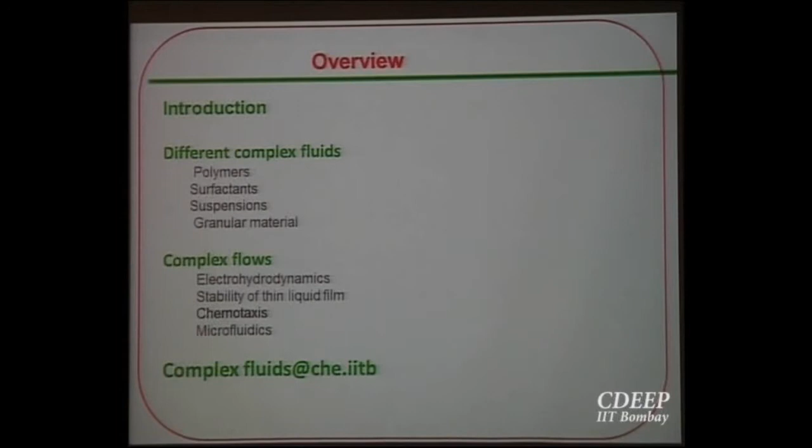Here I am going to give you a brief introduction on the present status and the opportunities in areas of complex fluids. So I will first give a brief introduction, what is complex fluids, then I will move to different types of complex fluids such as polymers, surfactants, suspensions and granular materials. Those are not the only complex fluids available in nature. The complexity is beyond, but the time is limited and the patience also will be limited. So I have put the main complex fluids related to the chemical engineering disciplines.

Then after putting those introductions on complex fluids, I feel this is not enough. Probably there is something which is complex flows, which consist basically of fluids that are simple, but when you combine those simple fluids, the nature will be basically complex. So I have put the behavior of complex flows. In general, these complex flows are also treated as complex fluids. Under this umbrella, key things which will come are electrohydrodynamics, stability of thin liquid films, chemotaxis and microfluidics.

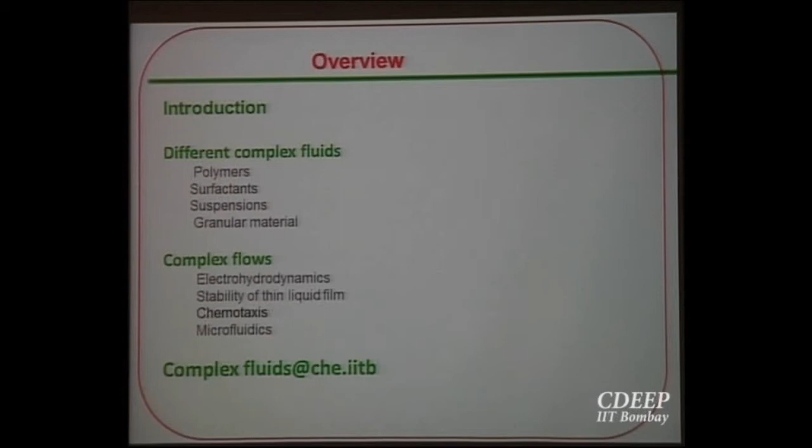Let us try to understand what is complex fluids. There is no particular definition of complex fluids. The definition is obviously a negative: what is not simple fluid, that is complex fluid. Now let us try to understand what is simple fluid. Suppose you have a fluid confined between parallel plates. You have solved this problem in your transport phenomena classes. This is a very simple problem. Either you move one plate or you move two plates, then put the boundary conditions. You can solve the simple momentum balance equation or Navier-Stokes equation to get the flow behavior.

In doing so, what you consider is that stress is proportional to rate of strain. Sometimes it is called rate of deformation, but this is some spicy name, that is strain rate. So the constant which indicates the proportionality is the viscosity of the fluid. That is the property of the fluid which will act when there is deformation, otherwise it has no role to play. Then after putting the relation in your Navier-Stokes equation, you get what should be the velocity profile. Obviously you will get a linear profile provided your flow is laminar.

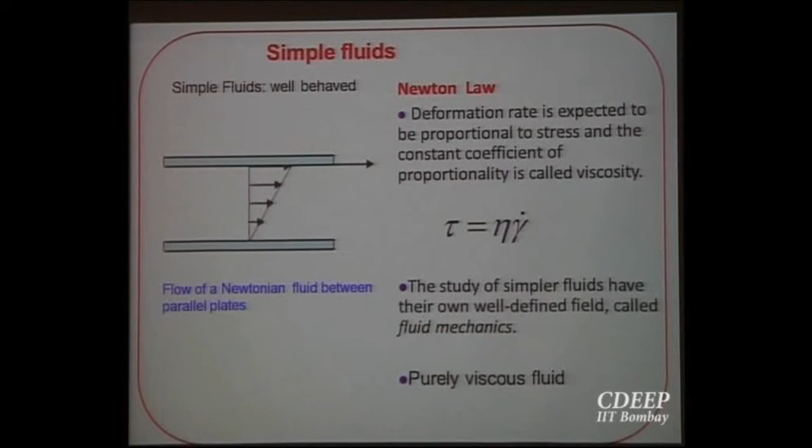Those are purely viscous fluids. If you give them energy, there will be dissipation, ultimately there will be a balance. There is no memory effect of the fluid. Fluid cannot remember anything. The behavior is instantaneous, and after certain time it will reach a steady state, and you can get a nice velocity profile there. Now, I have introduced the simple fluids. I have taken the properties which are called rheological properties.

Let me tell you what rheology is. Rheology is nothing but the study of deformation, and the fluid is a substance which deforms. There is a difference between solid and fluid. I think all of you know that for fluid we consider rate of deformation, for solid we consider only the deformation, which is described by Hooke's law. Now, complex fluid does not follow Newton's law or Hooke's law. There might be a combination of both, but it is not a single relation.

So, the mathematical formulation which relates your shear stress with the deformation is called constitutive relation. I have written it here because constitutive relation is the only relation which makes the difference between a simple fluid and a complex fluid. So, what are the rheological properties? Three properties are there in general we deal with: shear stress, normal stress and normal stress difference. For Newtonian fluid there is no normal stress difference, like sigma xx and sigma yy, there will be no difference in case of simple fluid, Newtonian fluid, but there will be a finite difference if the fluid is non-Newtonian.

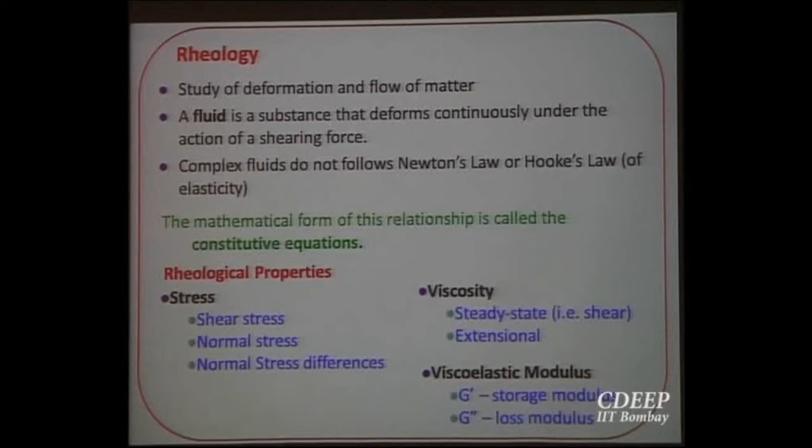The physical significance is that storage modulus means it is keeping in memory. The memory effect will come. It is some sort of elastic modulus. And the loss modulus is nothing but your viscous modulus, how much energy will be dissipated, and storage modulus will take how much energy within that to react after that. Suppose there is an elastic material, after deformation if you leave it, it will come to its original position as if it is remembering where it was, but a Newtonian fluid will never be able to remember that effect.

Now, non-Newtonian behaviors are shear thinning behavior, shear thickening behavior. Sometimes it is called yield stress, means the minimum stress required to go over that, and the other effects are viscoelastic effects, that means with viscous forces there will be some elastic forces also. And the resultants of these viscoelastic forces are the Weissenberg effect, and some other outcomes of fluid memory, and die swelling. I will explain it one by one.

So, for a Newtonian fluid, if you look at this curve, it is perfectly constant. Similarly, for pseudoplastic and dilatant there is a change of curvature, means your viscosity is dependent on the shear rate. Bingham plastic is linear, but you need a threshold stress, okay? Otherwise it will not deform.

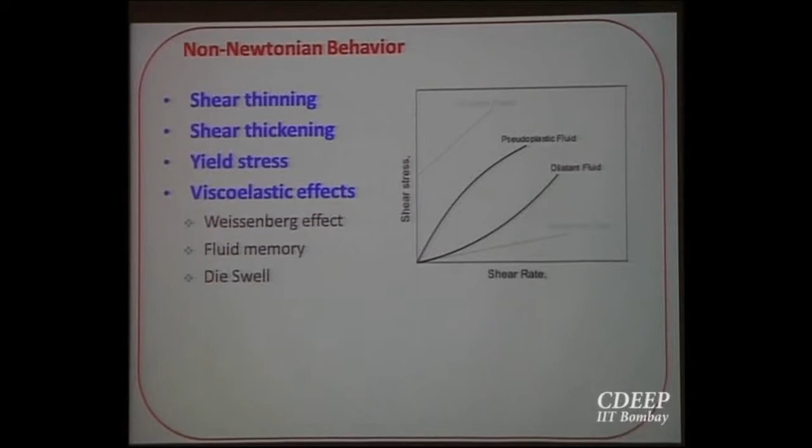Now, I have classified the complex fluids in everyday life. So, foods: emulsions like ice creams, foams, these are almost similar, gels or cheese. Personal care products: suspensions mostly related to surfactant solutions and foams like shaving cream. Biofluids or suspensions like blood, your gels. Other solutions are there. Liquid crystals are nothing but a particular orientation of your surfactants; they behave like liquid and crystal, that is why they are called liquid crystals. Pharmaceutical products, emulsions, aerosols and polymers are complex fluids.

Now, why do we need to understand complex fluids? Here is the reason. If not understood, they can cause immense trouble during their use. If understood, they can reveal enormous potential for application.

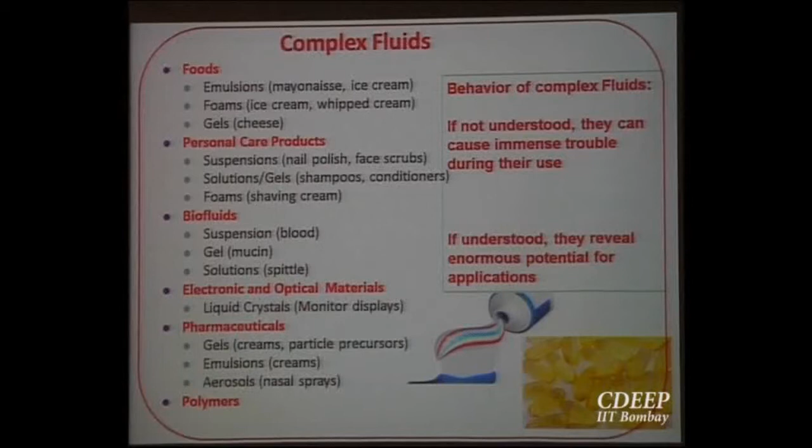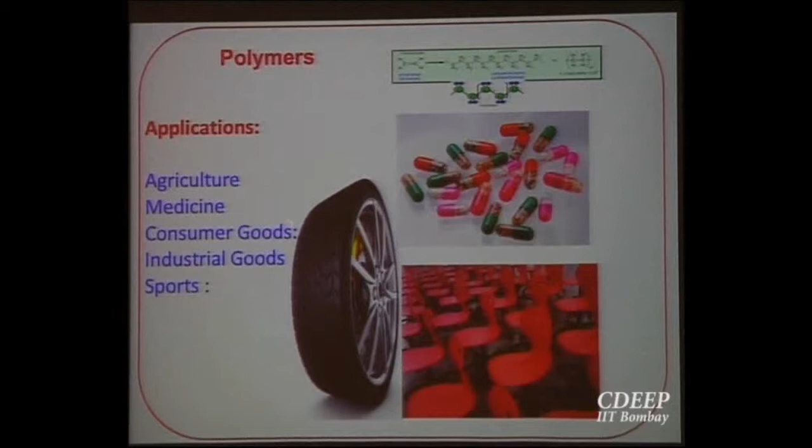Now, some colorful pictures. Polymer application is everywhere. Nowadays, there are restrictions on using polymers, so more emphasis should be given to research on polymer use. Agriculture, medicine, consumer goods, industrial goods and sports.

Polymer properties. As I told you, there is the memory effect. So, elastic over a short time scale and viscous over a long time scale. Short time scale means it can remember the deformation for a while, but if you give that deformation for a long time, it may not be able to remember its initial state. That is why those are called viscoelastic.

Now, shear thinning behavior is observed in the case of polymers. What is shear thinning? If you put high shear, there will be thinning, there will be a decrease in viscosity. That is why it is called shear thinning. Similarly, it happens for extensional strain rate also; like your shear viscosity, there is extensional viscosity, that also can change.

Now, what are the major parameters which play an important role in polymer dynamics? Those are entanglement. Polymer chains will club together and entangle with each other. That basically dictates the properties which we will observe.

So, entanglement increases the viscosity and reduces the shear thinning properties, like the change of viscosity will reduce, but the viscosity will increase and slow down the response. Now, you can easily understand the phenomena. Suppose lots of chains are entangled together, so degrees of freedom are basically decreased. Now, if you put shear, they are not able to align.

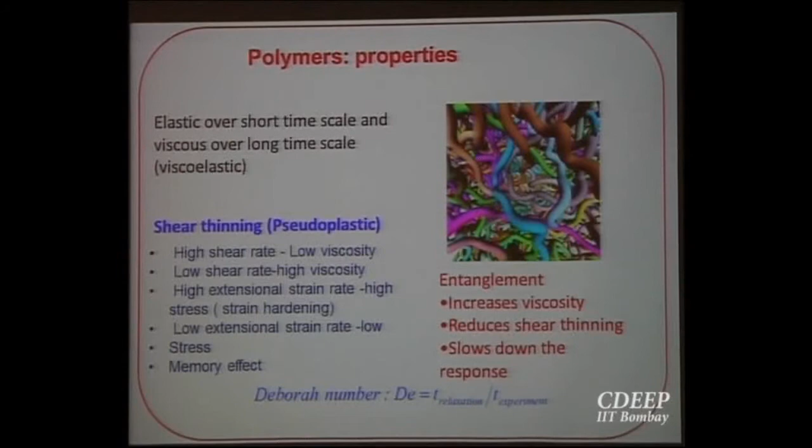So, Deborah number basically dictates the nature of the polymer dynamics. This is nothing but the ratio of relaxation time to the experimental time scale. What is experimental time scale? The time within which you can observe the change of the property. If your experimental time scale is much more than your relaxation time, then you can observe different behavior than the other way.

Here are some nice pictures. This is called Weissenberg effect. What is there? Suppose in a vessel, in a pot, you have polymer solution. Now, you are rotating. This is called a rotational type geometry. So, if you rotate it just by a rod, what will happen? Polymer will climb. It is a very well known phenomenon, called Weissenberg effect, and it happens due to the normal stress difference.

For a Newtonian fluid, it will just simply rotate, or there might be some depression near the stick. But in case of polymer, a normal stress will be created, and since it is a free surface, it will try to climb out. Now, the climbing will depend on different interfacial phenomena and the gravity forces.

Similar thing happens when there is a die. Suppose your polymer fluids are flowing through the die; when it comes just out, due to the normal stress, it will swell. So, this phenomenon is very important to study in the process industry, where you use extruders very frequently, in polymer processing. So, the complication in this area is memory effect. For that, sometimes we need to use a convected reference frame.

Polydispersity: molecular weight of the polymer might be widely dispersed, so your property also will change. Now, how to tackle this polydispersity in your situations? Branching will again control the outcome of the entanglement, similarly copolymers, blends and composites. So, these are the areas of interest at present. Scope of the development: polymer theory, new numerical simulation, new techniques for simulating those situations. One could be molecular simulation, really difficult, but probably doable maybe 10 years, 20 years down the line.

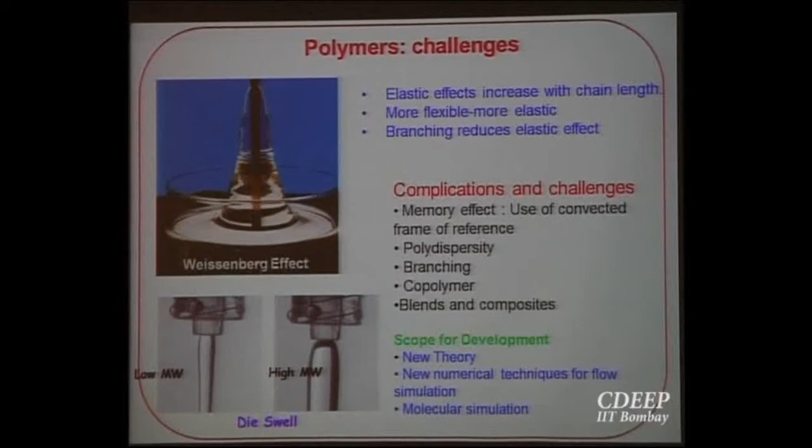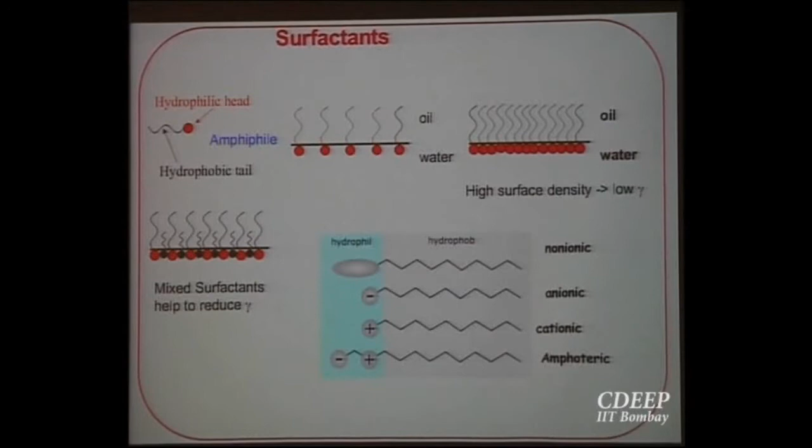The next is the surfactant, we use that. There will obviously be a hydrophilic head and hydrophobic tail, and that head might be different: non-ionic, anionic, cationic and amphoteric. So, depending on the concentration of the surfactant in your solution, there might be different phases like lamellar phases, or you can get liquid crystalline material, or they may form a ball-like structure, micelles. Here are the structures.

So, applications are detergency, wetting, cleaning and cosmetic formulations, food and pesticides, drag reduction, but it is not that drag reduction will always happen. Control of the rheology, protein crystallization and microemulsions. Different structures are formed by the surfactant here depending on the concentration of the surfactant.

Phospholipid is one such surfactant, basically a biosurfactant, which protects against alveolar collapse in our lungs, defends against pathogens, is anti-inflammatory and antioxidant, and helps in breathing, improving the lung compliance and deformability.

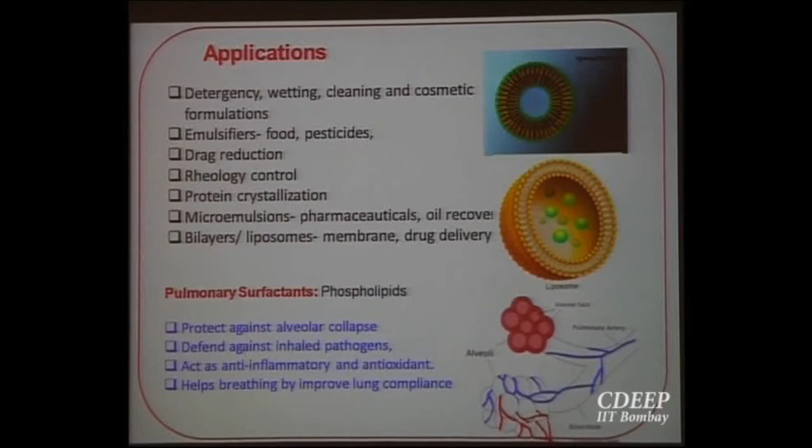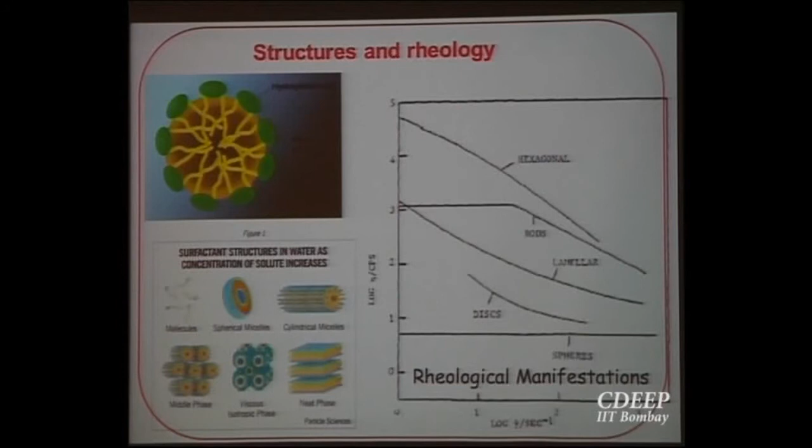I have taken from a literature how rheological behavior changes. So, here is the viscosity, and depending on the different phases, your viscosity changes. That is what is important. Different phases like hexagonal, rod-like structure, disc-like structure and spherical structure. So, you see that here viscosity is low in case of the spherical structure. That might be because one can slide over the other. So, the viscosity is very less in that case.

Liquid crystals are another outcome of the concentration-dependent surfactant solutions, which are used in displays as a filter and for detection of hot spots in any reacting system.

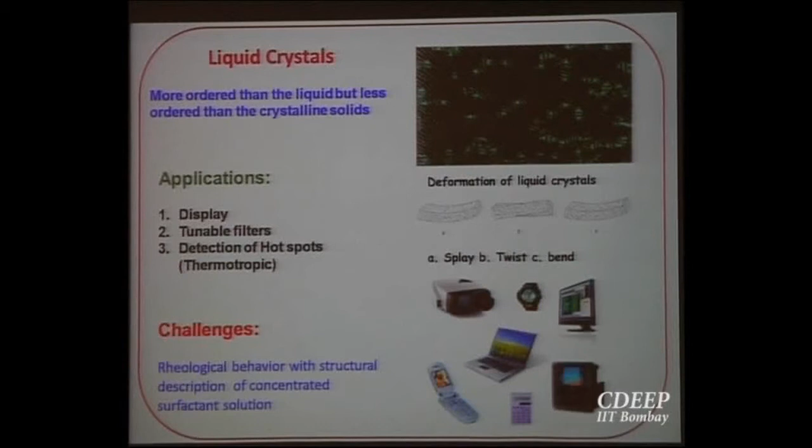Challenges are rheological behavior with structural description. You find there is a strong correlation between the structures, how the surfactants are orienting themselves in the fluid, and their rheological property, mainly viscosities. So, the challenge is to understand what is the structure which is giving me such rheological behavior. The structure and rheology correlation is the main challenging area in case of surfactants as complex fluids.

Now, the case of suspension. We are chemical engineers, we cannot do anything without thinking of suspension. Suspensions might be in a different form, like gas-solid suspension, liquid-solid suspensions, liquid-liquid, that is called emulsion, and so on. What are the important parameters in this area? The volume fraction.

Now, the particles which are in the fluid might be small, might be bigger. Depending on that, Brownian force can play an important role. If the sizes of the particles in a fluid are submicron, then Brownian force plays an important role. So, the main idea is to understand different forces and the observed behavior here. Forces might be van der Waals, electrostatic or Brownian. To understand the deformation behavior there is a very old Einstein relation, already well established, but beyond that, there is scope to understand either by numerical simulation or by experiments.

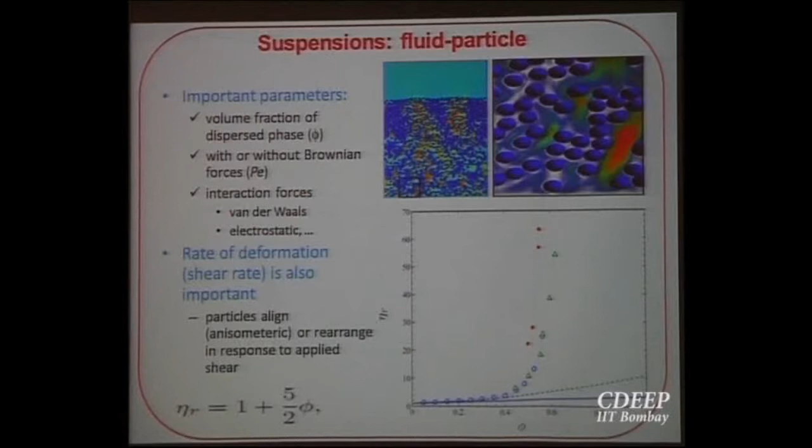If your particles are nanoscale in a fluid, that is called nanofluids. Nanofluids have enormous application now because of the high transport coefficient. Mass transport coefficient, heat transport coefficients, all are very high in case of nanofluids, and for nanofluids this relation is not valid. We find the viscosity will be much higher than that.

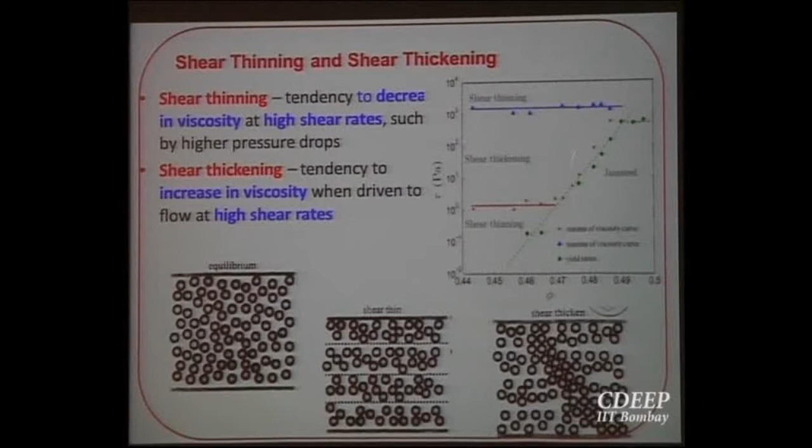But if they form any cluster or a particular structure which hinders the flow, then you will find shear thickening behavior. Suppose after putting a threshold shear, those particles are aligned in such a way that they form some structures inside. After formation of this structure, you cannot move the fluid very easily. That is why you can observe shear thickening behavior. I have taken that from a Nature article published around 2011 or 12.

Now, quicksand is one such suspension. It is a colloidal suspension because the sand dimensions are in the colloidal regime there, not always. You can get sand of millimeter size as well. It is called a hydrogel. When undisturbed it behaves like a solid gel, but if you disturb the equilibrium situation, then there will be a change in viscosity.

If you put your feet on quicksand, the force required to remove your foot from the quicksand at a speed of 1 centimeter per second is about what is needed to lift a medium sized car. Suppose you are walking on quicksand; the structure of the sand will change because of the stress. The viscosity will decrease. Then when your foot goes inside the sand, it will reorient itself in such a way that water will come out and pure sand will surround your feet. So frictional resistance will increase very high, because sand particles have friction between each other, and you have to put a force equivalent to a medium sized car.

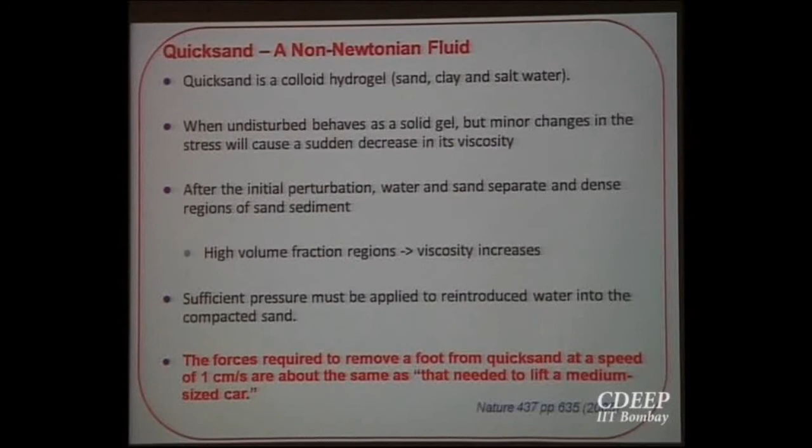Now, there are complex fluids which are nothing but aggregates of fat and fat crystals. The morphology of the crystal depends on the process and composition parameters like solvent, supersaturation, temperature of these fat crystals, and modifying additives. So, here also you will find the correlation between the structures, which depend on these additives and saturation temperature, and suspension rheology. So, there is clear evidence of the structure-property relation in case of fat crystals as well.

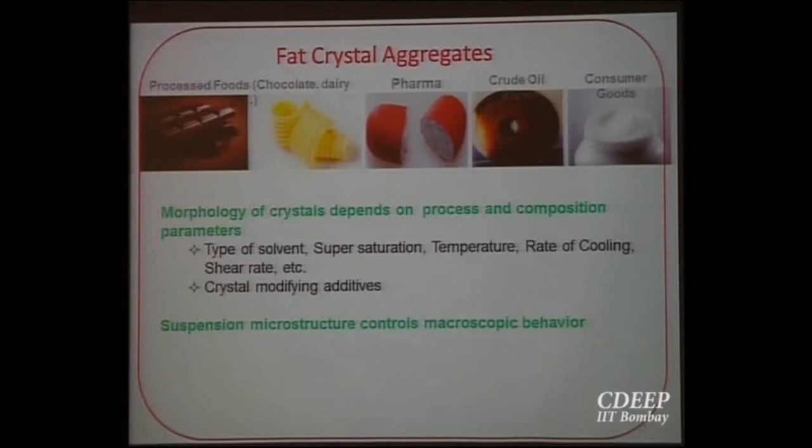The other one is the nanostructured glass. Those are highly transparent solids and glassy materials. The dynamics is detected by the glassy dynamics, that means a very dense phase. Those things are in a very dense phase. Applications consist of encapsulation technologies to protect the material and storage of biological materials.

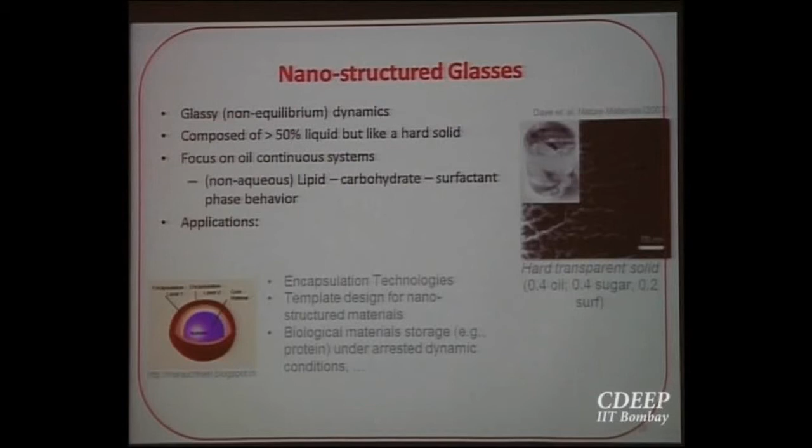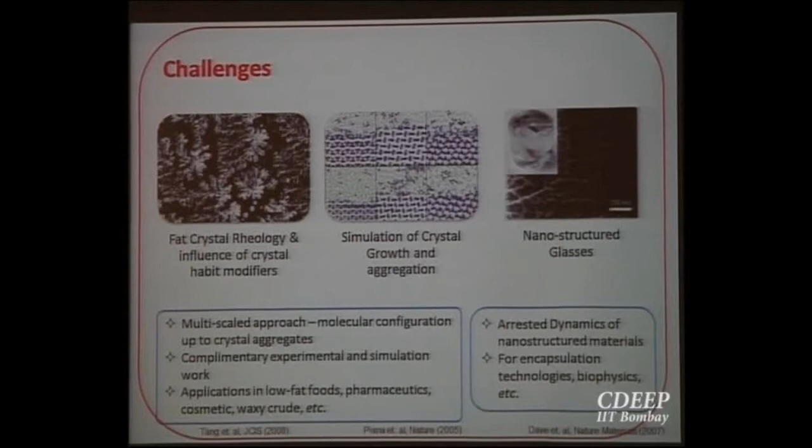Challenges are listed here. So, you have to try to understand the structure and rheological property relation. To understand the structure, you can take help of simulations, as Atik told in his previous talk. So, you can go with a multi-scale approach to understand how the crystal will be oriented, and they will show you the observed behavior. So, you can go by comparing your simulation results with experimental observations. In this way, you can study the arrested dynamics as well. Arrested dynamics is nothing but the dynamics when the system is very much confined and highly dense.

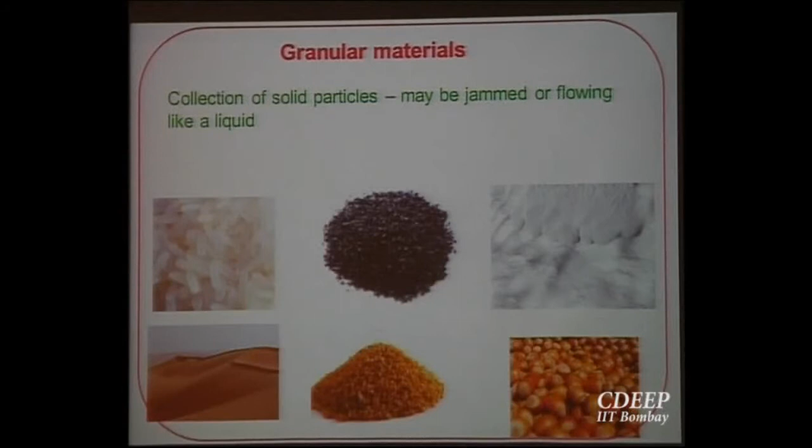The other thing is the granular material. This is one of the complex fluids. So, here I have listed all those. Avalanches, rice, dals and different grains all belong to this granular material community. So, where is the complexity? Sometimes you will find granular material is flowing like a fluid, sometimes it is not flowing at all. So, there is a range of behaviors which can be observed depending on the surroundings and the situations.

Suppose you have a few nuts, small nuts, and the big nuts are called Brazil nuts. So, if you take them in a pot and check, the material density of all the nuts is almost similar, the difference is only in their sizes. So, what can you think of? The bigger size particle will have bigger mass, that will go down, but it never happens. The bigger particles will come up, smaller will go down. This is called the Brazil nut effect. You will be surprised, but there was no explanation which could explain the situation till around 2009.

This can basically be explained based on free volume theory. The free volume surrounding the larger particle will be much more because of their structure. So, the small nuts try to go inside and make a situation such that your center of gravity exists at the bottom. That is why the bigger size nuts will come up.

This phenomenon you have already observed in the hopper. If you fill it with granular materials, sometimes arch formation happens and flow stops. But it will not happen every time. If your particles are very hygroscopic, you will find arch formation. If your particles are of very small size, you may find arch formation. So, what are the parameters that control the situation?

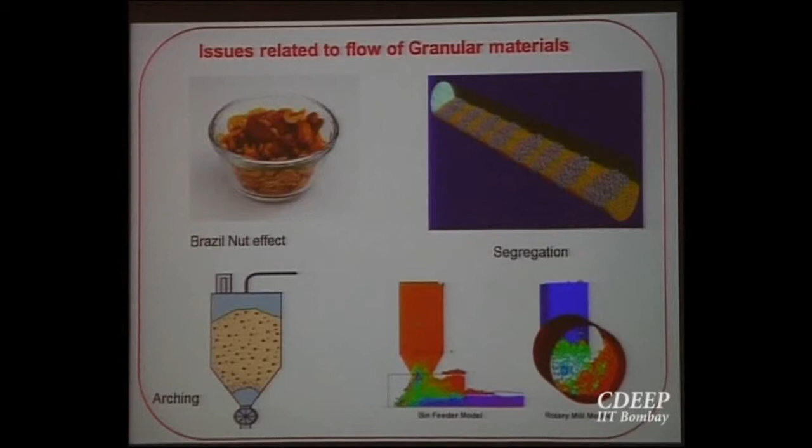Now, sometimes your objective would be to mix granular material of different shapes and sizes rather than segregation. Most of the time, that is the objective. Now, you have to find out the situation, or design some methodology so that you can mix those. Now, how can you do that? You can do that only if you understand why it is happening. So, understanding the segregation phenomena in detail is one of the challenges in the case of granular flow.

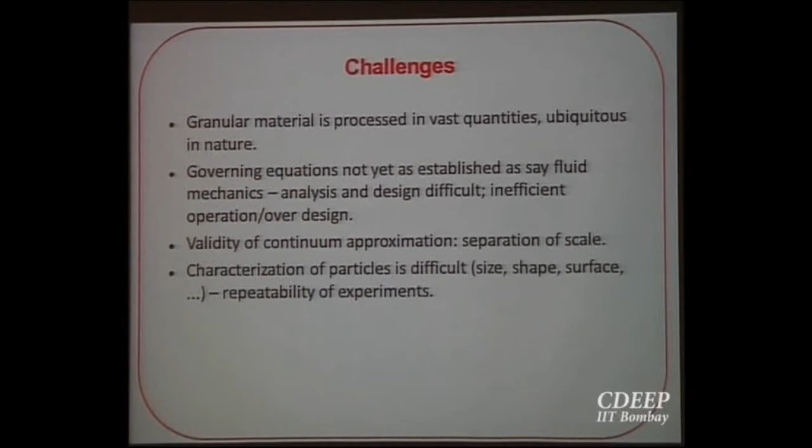So, I have listed here. If I ask you what is the constitutive relation in the case of a Newtonian fluid, you will tell Newton's law of viscosity. But can you tell me what equation describes granular material? No, you cannot, because there is no well established relation till date. So, we are trying to investigate such a relation that can explain the whole range of granular systems, which will be independent of size, surface property, or shape. Till today, there is no such relation.

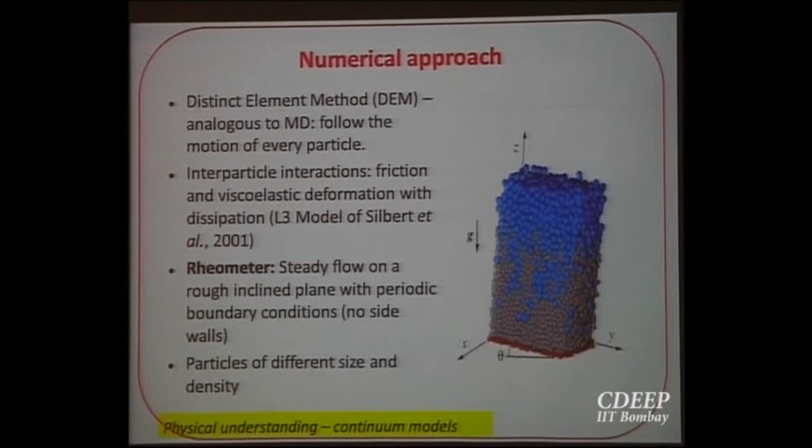Already Atik has described a bit of numerical simulation. Probably this is very similar, that is why I put it here. So, to find out the constitutive relation, sometimes a simulation called discrete element modeling is done. You take some particles, you apply the concepts of Newton's law of motion with particle-particle interactions. There are different models to address the interaction between the particles. You do a simulation which can take a couple of days or a couple of months, and try to understand the behavior of shear stress with velocity gradient, and try to formulate one constitutive relation. So, this is one way. The other way is to perform experiments.

Now, come to complex flows. First thing which comes in our mind, we have understood hydrodynamics of Newtonian fluid, suppose. Now, if you are having emulsion type fluid and you put one electric field, what should be the behavior? Or if you have a single oil drop in water and you are putting an electric field, what should be the deformational behavior of that oil drop, some sort like that.

So, electrohydrodynamics is nothing but the hydrodynamical behavior in presence of an electric field. That can give you interface deformation, and if the interface is deformed, it can change the field strength. So, what could be the equilibrium shape and size? Now, with that understanding, can we miniaturize that so that we can encapsulate drug inside those deformed bodies, or we can make a pore inside that lipid-like structure or liposome and put the drug inside, so that it can be used in drug delivery.

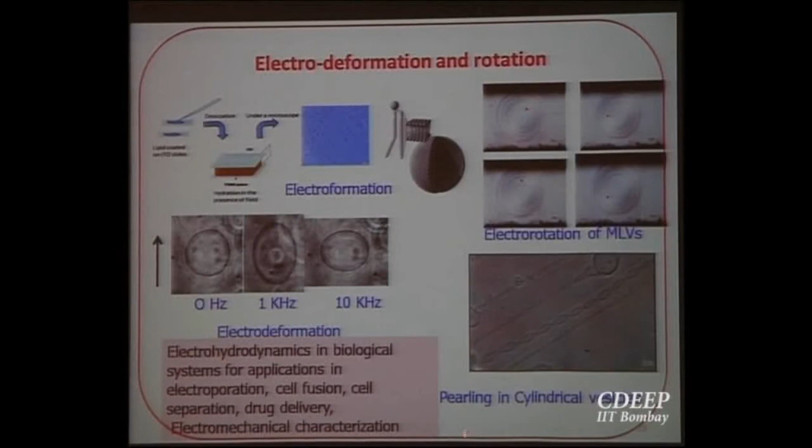If you change your field strength, sometimes you will observe that this curvy structure will form on the surface, and this is called pearling behavior basically. This is a curved surface and it will move like a pearl. So, this is called pearling in vesicles. With the same electric field, you can generate lots of drops on a surface in a fluid. This is called pattern formation on a planar system. Or the jet: suppose you have a very thin jet, if you put an electric field, it will start to whip, that is called whipping of electrified jets.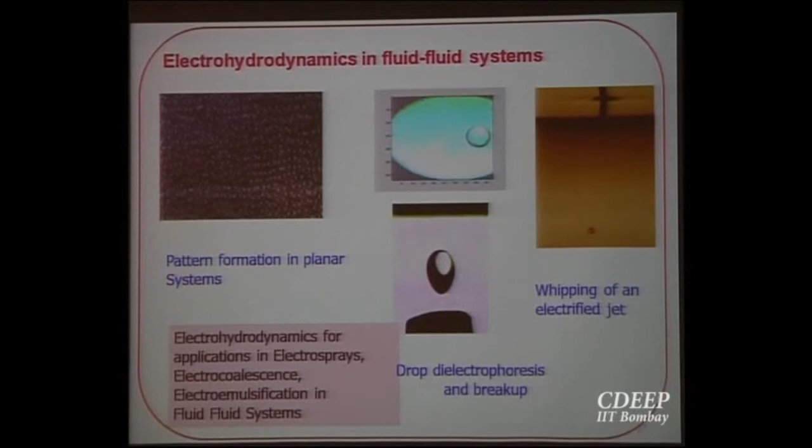Another field is chemotaxis. Chemotaxis is nothing but motion of living cells. All of you know what Brownian motion is. But if you have a cell of the same Brownian particle size, suppose a micron-size particle, the question is whether that living cell will behave like an inert particle. It is not, because they can understand if there is any food inside the system. So, if you generate some gradient and you put a living cell like E. coli, they behave in a different way.

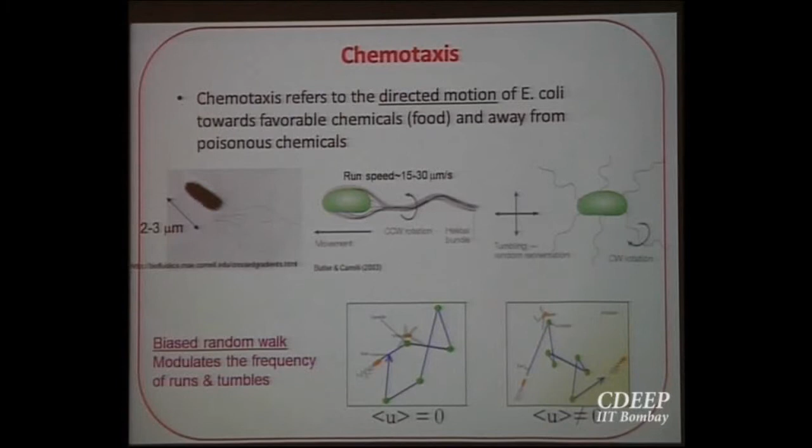Their motion is called biased random motion. It is not random motion, it is biased random motion. Because their motion will still be random, they will flip, they will move, but still they will sense the concentration gradient of their food. This is called biased random walk.

Another area is stability of thin films. The application is in the coating industry. Suppose you have to coat any material, so you should be concerned about the stability of the coating when the coating is in liquid state, whether that will wet the surface, or even if it wets, whether that wetting is really a stable wetting, otherwise during drying there will be crack formation.

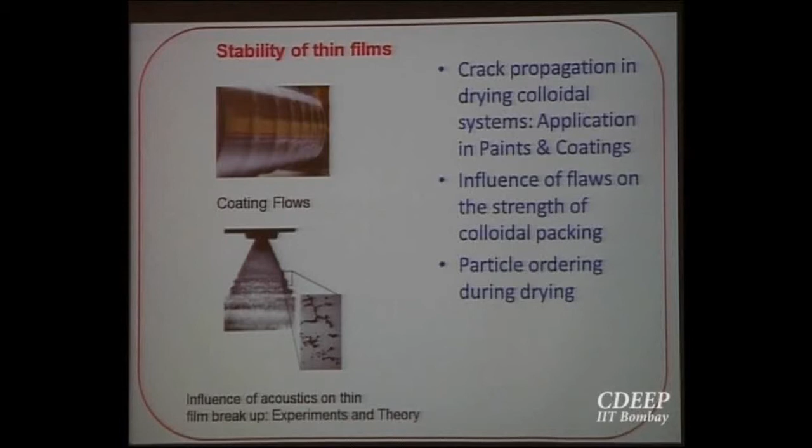A similar thing can be applied in the case of combustion, though the fundamental studies are the same, the stability of the thin film. A thin liquid sheet can break down under certain conditions: when the hydrodynamic forces and the surface forces are equal, then from a sheet you can generate drops. So, that understanding will help you apply these situations in the case of combustion.

Another area is multiphase flow. Multiphase can appear in different ways: material with different states or phases, or material in the same state but with different chemical properties. A few examples are bubbly flows, droplet flows, slug flows and particle-laden flows.

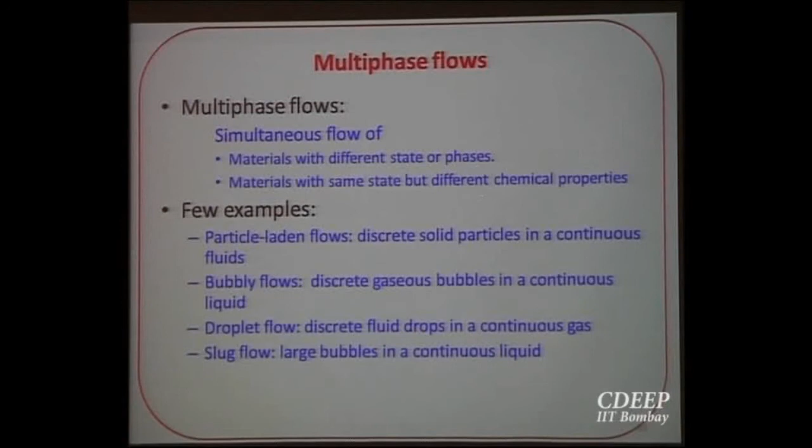So, when you are going to consider or predict the properties of a multiphase flow, you have to have understanding of both the phases. Suppose you have solid particles in air. Particles we do not know how to characterize, but air is obviously a Newtonian fluid, but the combination will behave in a different way.

For that you have to understand what should be the volume fraction of the solid, so that you can use some constitutive relation in case of dense solid, or in discrete or in a dilute solid, you can consider each particle individually and predict their properties.

The different ways are by direct simulation: you consider both the phases and solve the equation, because for gas flow or liquid flow you know Navier-Stokes equation, and you consider each particle individually and solve their equation of motion, and jointly solve both the phases' equations to get the properties. The other way is experimental investigation.

There are advanced experimental techniques to understand the phenomena. Here I have put something related to PIV. Suppose you are putting one laser sheet here, you are scattering that laser sheet from the seeded particle. Suppose you want to measure the velocities of the fluid phase, then you have to seed the fluid phase with some small particles. If it is air, you have to give a fog, like what we use in theater. That fog, small droplets of micron size, will scatter laser light.

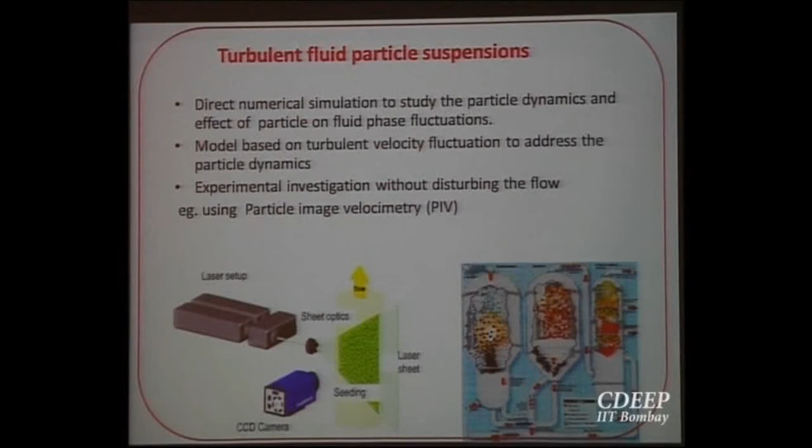You take that image in the camera, you analyze the image and get the velocity profile of the fluid phase; that is called PIV. Similarly, micro PIV is also being used to check such flows in microscopic dimensions. Here is just a cartoon type picture to show you the complexity inside one reactor.

So, next in complex flows, the area of importance in recent days is microfluidics. What is microfluidics? It is nothing but a miniaturized flow in micro dimension. The micro dimension is of the order of 10 to 20 micron scale. Suppose there is a high speed gas flow in that micro device.

Then if I ask you to solve such a problem in a laminar regime, you cannot apply no slip boundary conditions at the wall, because at high speed the gas will be very diluted and your flow dimension is micro. So, that is equivalent to the mean free path of the gas molecule. That is why your no slip condition is not valid.

Then you have to find out some different boundary conditions depending on the flow behavior, which will be applicable in such a scenario. That is why it is complex flows. Otherwise, in case of liquid through a micro channel, the no slip boundary condition is satisfied.

But this miniaturized microfluidic system can be applied to synthesize polymer nanofibers or polymer nanoparticles and high throughput biological devices. The concept of microfluidics came up from the chemistry perspective, to control the rate of the reaction to find out the rate equation or rate constants. And that also can be used for filterless separation technologies.

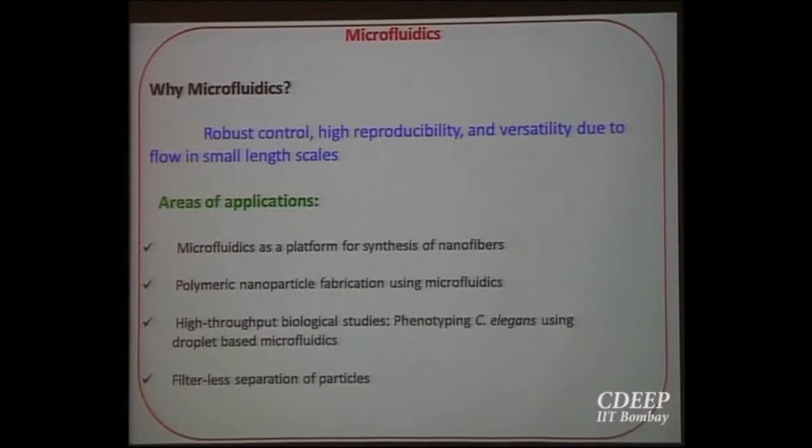Suppose you have particles with different diameters passing through a 200 to 500 micron channel; they will segregate in different layers and you can separate those particles. So, that is called diameter dependent filterless separation techniques. Here are a few pictures of the applications, like you can generate tissue scaffolds, and you can put an electric field in microfluidic devices to generate nanofibers.

Applications are in the area of drug delivery, particle sensors and photonic crystals. These are the generalized approaches. You can take one path and go ahead to study the system. So, as I told you, electrohydrodynamics. A combination of electrohydrodynamics and microfluidics will give you some phenomena which can be used for synthesis of polymer nanofibers, and that is called electrospinning in a single term.

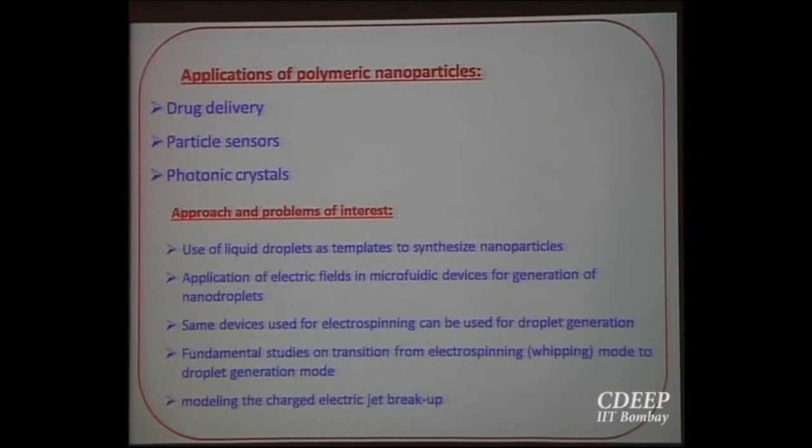Now, the advertisement part. In our department, different faculties, Professor Khakhar, Mehra, Bellare, Mahesh, Sunthar, Rochish, Samir, are all working in different areas of complex fluids. Professor Juvekar is working on polymer and interfacial science; you have heard his lecture yesterday. I am working on multiphase flow, Venkat is working in the areas of microfluidics and electrospinning.

Jyoti is working on fat crystals and their glassy structures. Ratul is here, he is working on free surface flows and their stability. Abhijit is working on cell mechanics. After that, I want to show you one phenomenon. I think I have time.

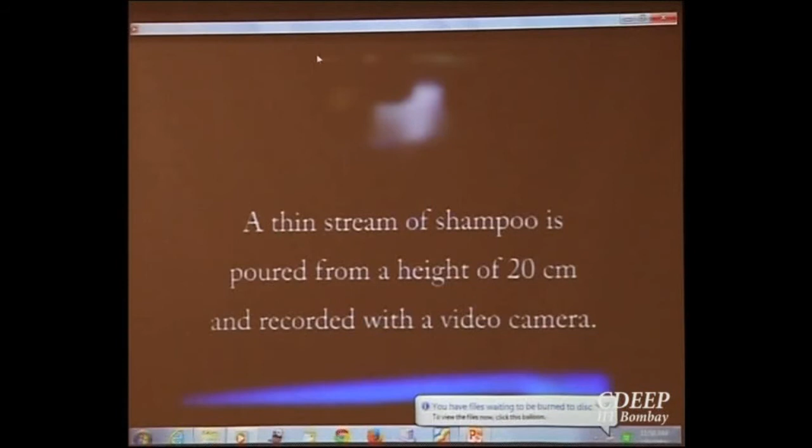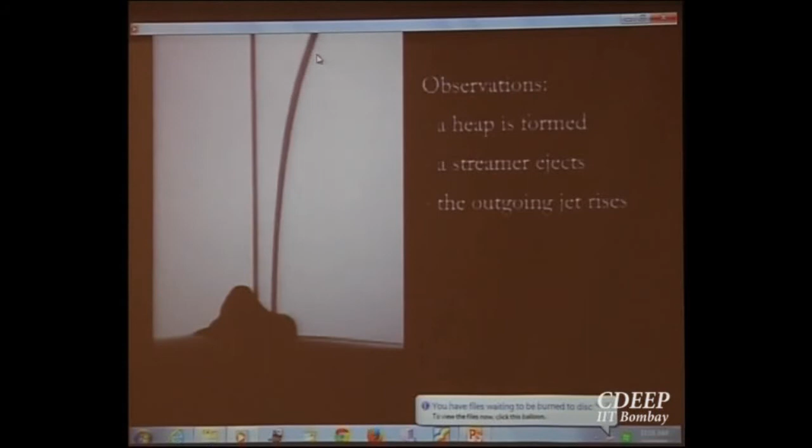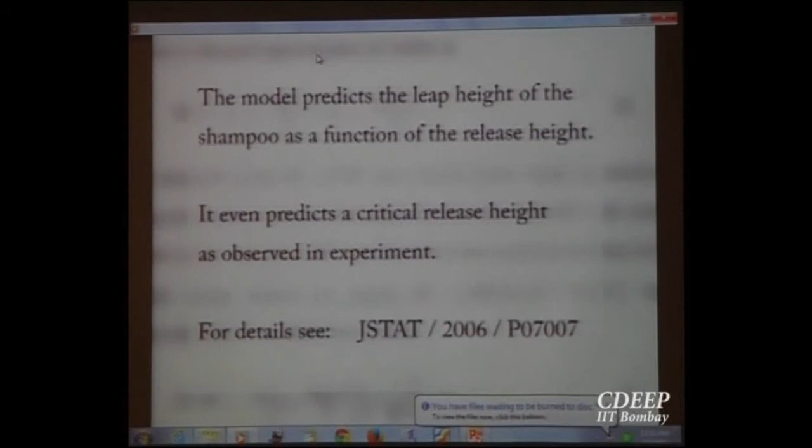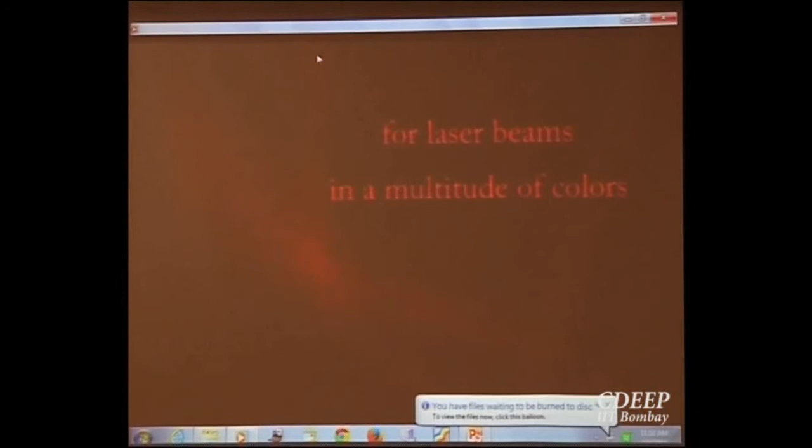Probably you would have seen that. If not, try to have a look. So, thanks Ratul who told me about this. It is a YouTube video. I think now you will agree with me that it is really complex.

Most of the colorful references obviously are not mine. I have taken them from the web and a few published articles. Acknowledgement to Professor Zubekar and Jyoti for helping me in making these colorful structures of the presentation, and my colleagues who have shared different information.

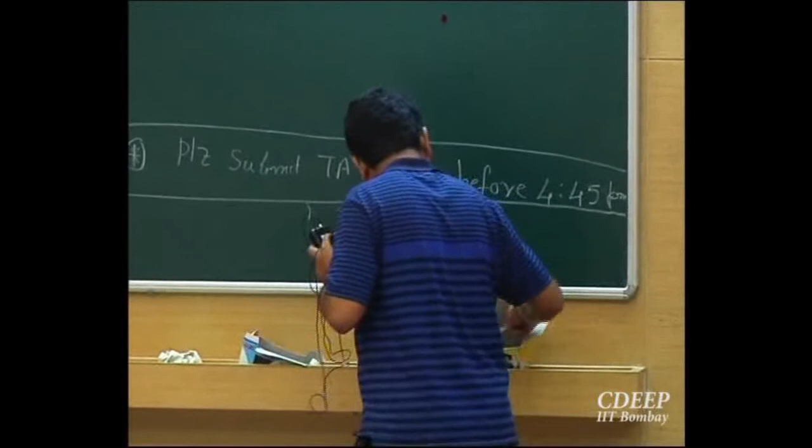So this is a problem which is very simple to observe, not so easy to understand, but at least very simple to observe. So all you have to do is go near a tap where there is a basin below the tap, and just make sure that the basin has a flat surface. And let's say this is your tap,

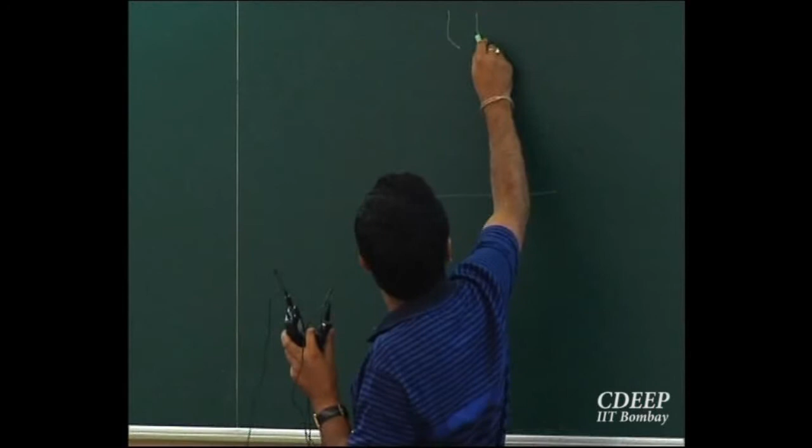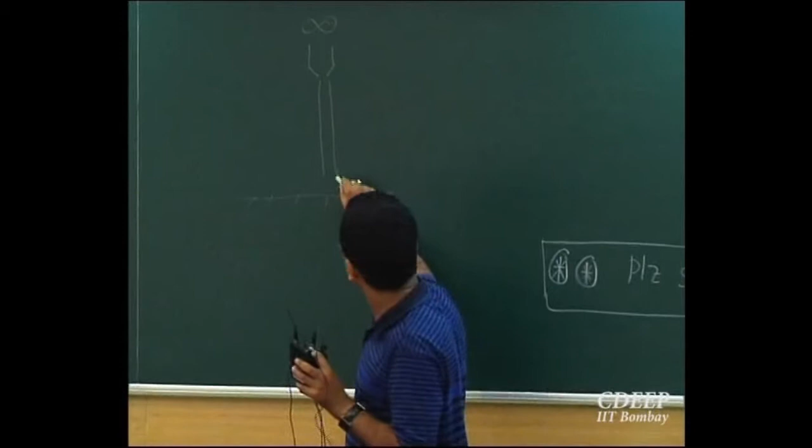and you have something which you can rotate and switch on the water, and this jet of water falls and hits this surface which is a wall, and then starts spreading out in kind of an axisymmetric manner. Okay, so what you are going to get is a jet of water flowing out, and then you will have a thin film here. Okay, so this is a layer of fluid which is flowing.

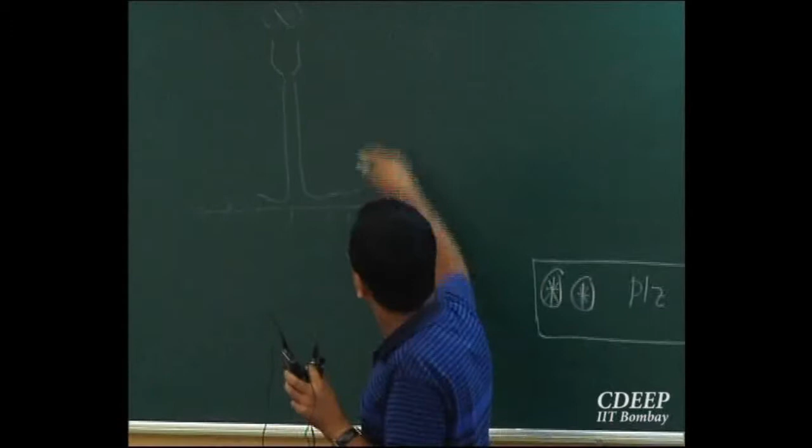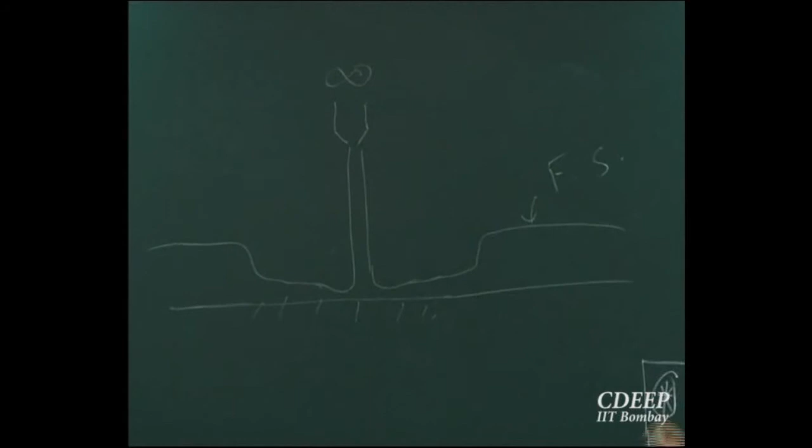So I would encourage you to go and try this when you go back home. It's very easy to do, and if you look from the top, you will see that at a certain distance something like this happens. Now this is what I call my free surface, the example there. And the reason why this is interesting is because if you look from the top, this thing will look like a circle. Okay, you can see it almost every day.

And this is what is known as a hydraulic jump. Okay, it's a jump because the interface is like jumping from one height to another. And it's a very interesting problem. It's also a very old problem. If you tried looking at the scientific literature, you will find that the earliest mention of this problem was almost 100 years back by a person named Rayleigh. Okay, some of you have heard about Rayleigh. Yeah, so he had kind of mentioned this problem.

Now it turns out that this problem of interfacial flows, again remember this is a laminar flow problem. Okay, we can make it turbulent, of course, by pushing the mass flow rate higher and higher, and then the jump wouldn't vanish. It would start oscillating and doing things which are more complicated. But the interesting part about this problem is that you can get it under reasonably laminar conditions. Okay, so once the flow settles down, you would get a very specific radius at which this structure forms.

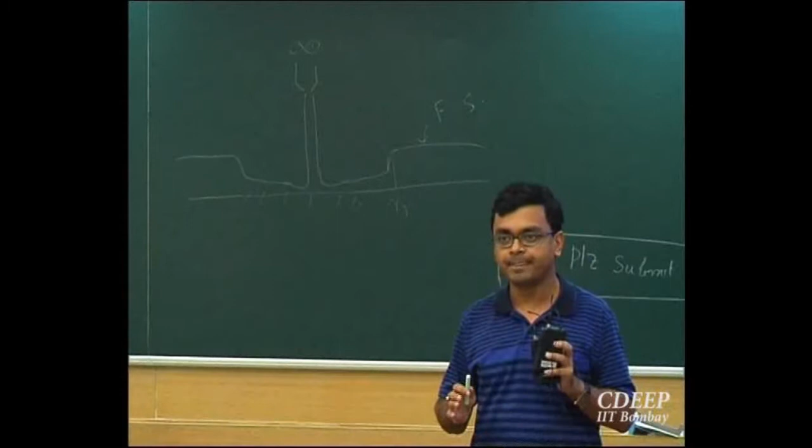It's a laminar steady flow, and the challenge is of course to understand why and how such a structure should form. I mean, if I were to give you a wall and give a flow, and if I didn't tell you anything more, you would probably not expect this. Okay, you would probably just think that the fluid would just flow and fall out of the plate or whatever on which it is falling. So you wouldn't expect it to suddenly jump to a certain height and then do this. So in some sense this is kind of non-intuitive. Okay, and that's why it's interesting to understand what is this flow doing.

Okay, so there are a lot of details about this problem, and I'll not try to get into all that. You can also get this phenomena in a channel. Okay, so this is not necessarily restricted. The easiest way to get this is under a tap, but you can also get this in a channel, and there also you would have a thin layer of fluid and then it suddenly jumps to another height. Okay, you can have very complicated things happening where you can have formation of waves here.

If you looked at the streamline pattern, have you all encountered the word streamline in fluid mechanics? What is a streamline? Any answers? Imaginary line of what? What is any property that the line has to satisfy? Tangent something? Tangent to that line gives you the direction of the local fluid velocity.

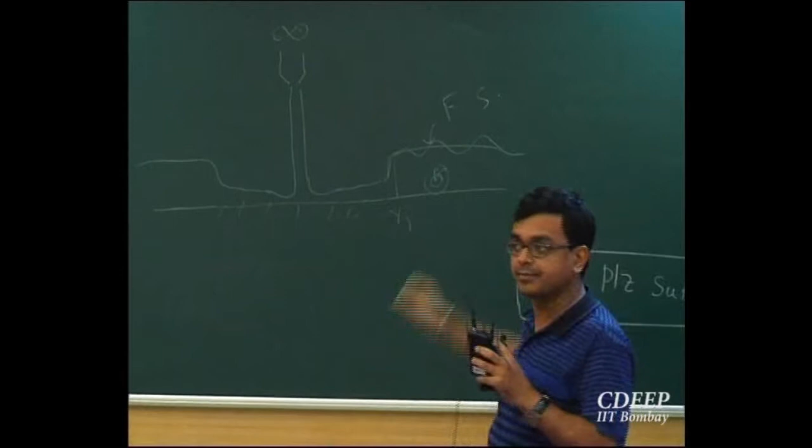Okay. So if you plot the streamlines here, you can get a very complex flow pattern where you will have fluid here going around in circles. Typically you would expect that if you injected some dye here, the dye would just get carried downstream. That may not be true. You may have patterns where things are trapped in a certain region and things like that. So these innocuous looking free surface flows, even in their laminar state, because of the additional degree of freedom, the free surface that it has, can throw a lot of surprises at you.

Okay, they are also very challenging from an engineering viewpoint many times, because you see this interface can support waves. Okay, so for example, have you all looked at sea beaches? You have seen waves coming in from the sea, and they topple over and they break, and you have a very foamy, frothy front which is created. So why do all the beaches contain sand? So where did all that sand come from?

Any answers? But why does a river bed not contain sand? I mean, you have seen that. Have you seen a river beach? Typically rivers don't contain a long stretch of sand, right? So why is it that the sea contains a long stretch of sand before the sea begins? Why? I mean, the river is also carrying things, right, and depositing it to the sea.

So this is where it gets interesting, because these interfaces support waves, and these waves can carry things. And these waves tend to come and break at the shores, so they end up depositing a lot of stuff, a mechanism which doesn't operate in rivers. So there is a lot which happens when you have these interfacial flows. Many times in nature they occur under turbulent conditions, but you can get very interesting problems to think about even under reasonably laminar conditions. So that's one area where I work.